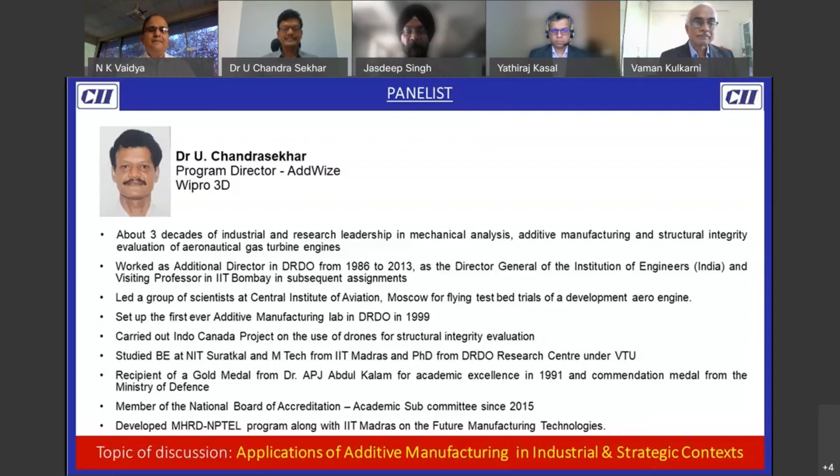Thank you for the generous introduction, Mr. Vaidya. Getting connected with you through this wonderful platform created by CII. Can I ask Mr. Jasdeep whether I am permitted to share the screen now? Yes, sir, we have given rights to present your screen, sir. Could you just confirm whether it has come into presentation mode? Because sometimes there could be a lag. Is my screen seen? Yes, sir, it can be seen. It is a full slide now.

As Mr. Vaidya mentioned, we have known each other in the context of manufacturing for quite some time. Just to refresh our memory, in the year 2004 there was an event at J.N. Tata Auditorium in IISc with focus on additive manufacturing.

Those days it was called rapid prototyping. We had the likes of Dr. Sumantran from Tata Motors, Dr. Pawan Goenka from Mahindra, and Dr. Bharat Balasubramanian from Mercedes as keynote speakers to delineate the potentials of additive manufacturing in product design and development. The keynote session was conducted by Dr. Kalam in October 2004. So those days, the technology was largely associated with prototyping and visualization.

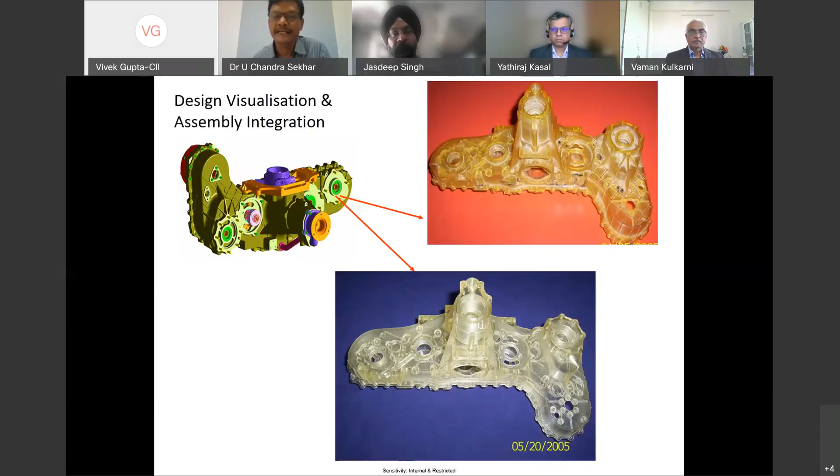Indeed, the poster boys for rapid prototyping or additive manufacturing used to be technologies like fused deposition modeling of Stratasys and stereolithography of 3D Systems, wherein the primary and most dominant application used to be conversion of CAD data into a representative physical model. What you see on the slide is the full-scale model that I did for the light combat aircraft program, related accessory drive gearbox housing, in 2005.

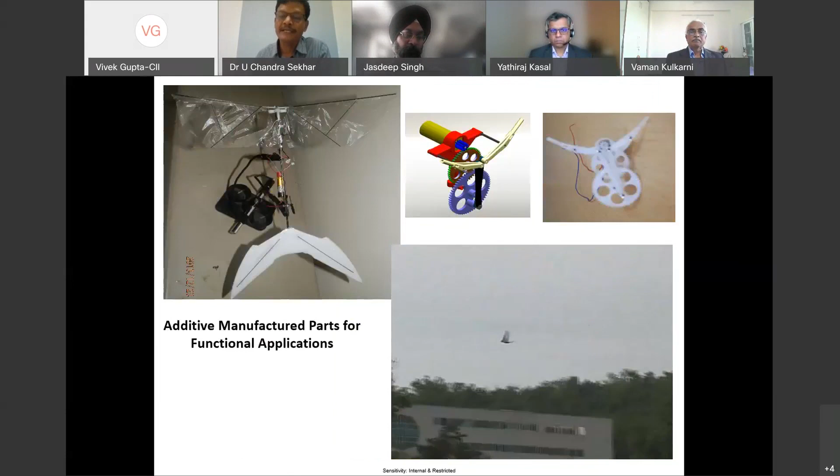When user groups started realizing that here is a technology also capable of producing thermoplastic parts with the necessary strength to surmount the loads and stresses connected with real-world applications, users started making use of these thermoplastic parts, as in this case for making a flapping mechanism that can power an ornithopter. This was a DRDO-NAL project done in 2007 or 2008 for demonstrating the possibility of a small duration ornithopter flight. But what was interesting happened later.

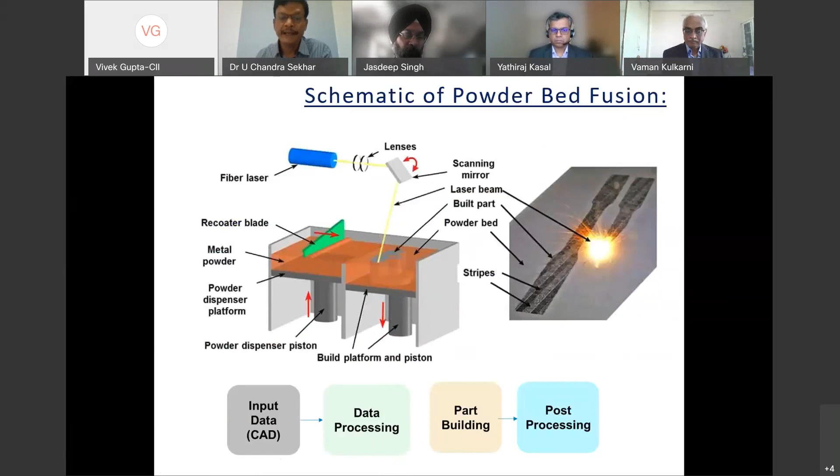Thanks to the contribution from interrelated topics like laser physics, material science, qualification, testing, software engineering, and control engineering, technologies like directed energy deposition, metal binder jetting, and powder bed fusion came to the forefront, and along with that came a plethora of applications.

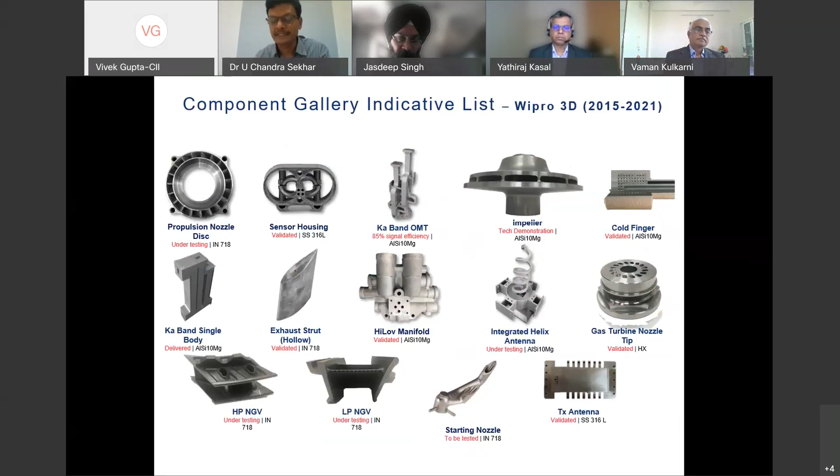The most important fact is, while the initial set of applications were largely confined to prototyping and design visualization, in recent times we have seen a paradigm shift towards a thrust or need for fulfilling end use. This could be in the context of strategic sectors like aerospace and defense, or the industrial context synonymous with automotive and process industries.

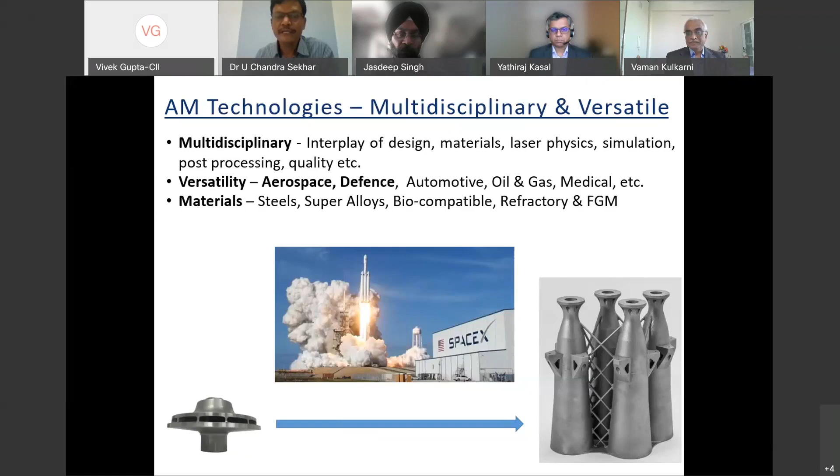What is also very important is there is rigor and earnest effort on the part of users to look at making complex parts that are supposed to withstand high pressures, high temperatures, extremely challenging environments including corrosion susceptibility, and make use of 3D printing or additive manufacturing to replace conventional manufacturing for a part.

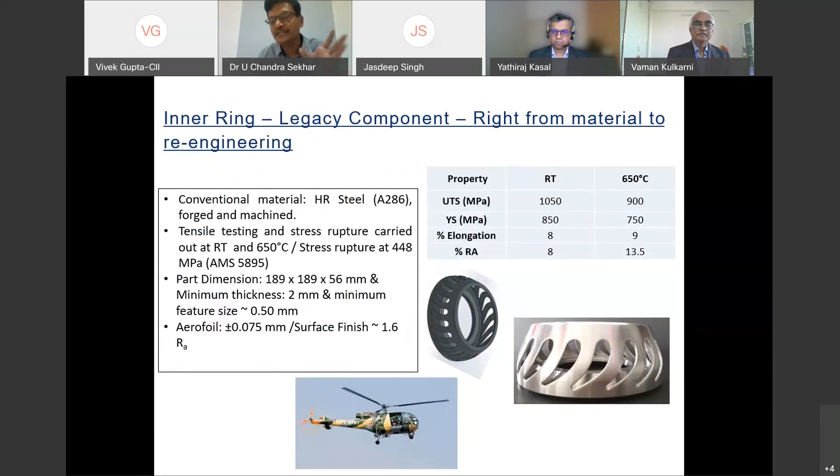Some of you might have seen this news item about 3 weeks old, wherein Wipro worked along with HAL to make an integral part of the Chetak helicopter engine called inner ring, made out of high temperature resistant steel, supposed to perform for the designated duration at more than 650 degrees centigrade. If you look at the entire process of development, the part building is only about 15 to 20%. The remaining 80% is all about developing the strategy for testing, proving out, and creating compliance with airworthiness authorities.

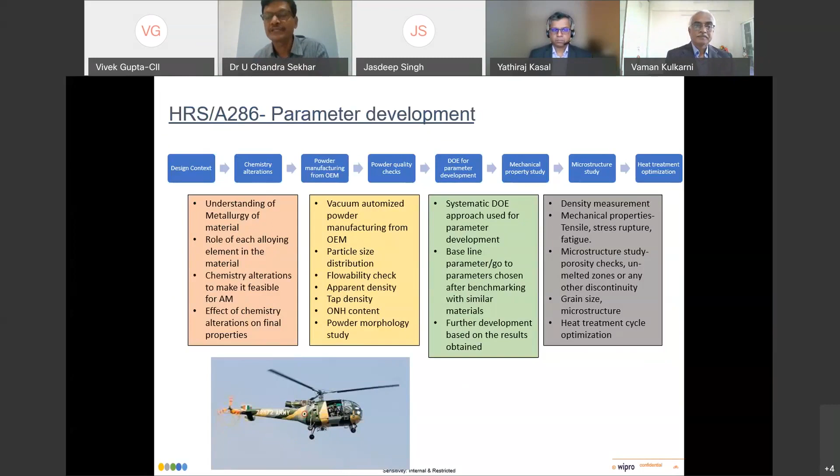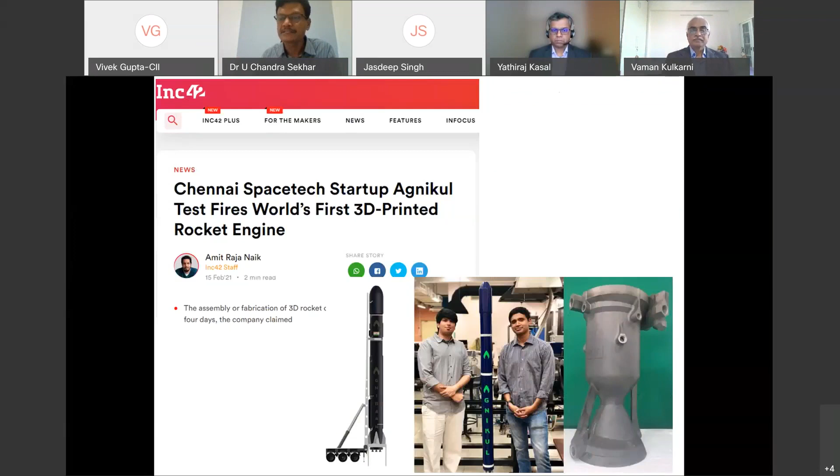So I talked about HAL, ISRO, and Wipro, which are large engineering conglomerates. It's very heartening to see similar phenomena evident in the startup ecosystem. Just a week before, we heard about a Chennai-based space startup called Agnikul, who created a monolithic rocket engine, including the injectors, cooling channels, igniters, using powder bed fusion out of nickel superalloys. We have seen teams from VIT Vellore, IIT Bombay, IIT Chennai, who happen to work with Wipro 3D in re-engineering some of the parts.

What is shown in this case is the steering knuckle made out of titanium. The conventional part is bulky. It was replaced with a very efficient design and converted into a physical edifice using laser powder bed fusion.

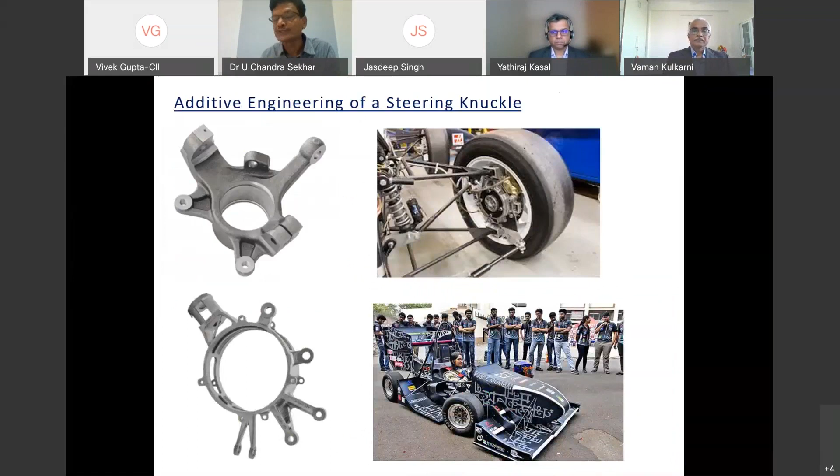So if you want to really capture the capability of additive manufacturing in the context of defense as well as strategic and industrial sectors, I would like to say that in the case of the healthcare sector, the acceptance has been to such a level that even series production of patient-specific implants and orthodontic aligners have come into place for almost 7 to 8 years now.

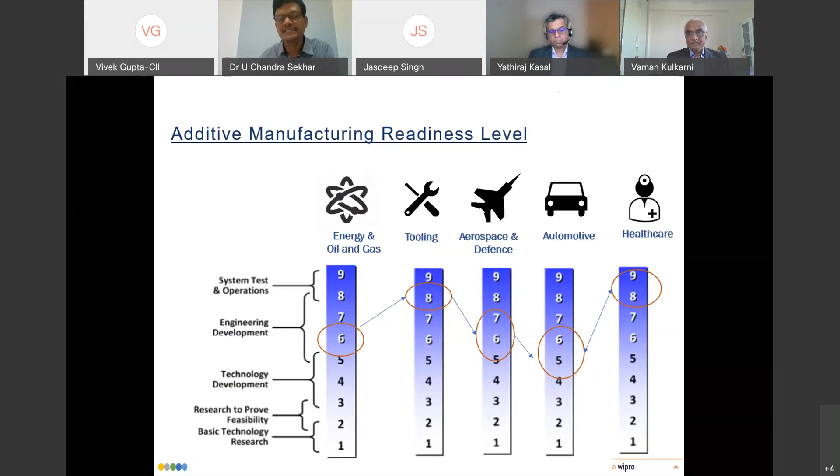Whereas in the context of automotive and process industries, where economic considerations are equally powerful alongside technical considerations, maybe the readiness is at a lower level. But continuously, there is an enlargement in the availability of material, including functionally graded materials, superalloys, refractory materials, titaniums, steels, and we have seen more and more new user groups emerging.

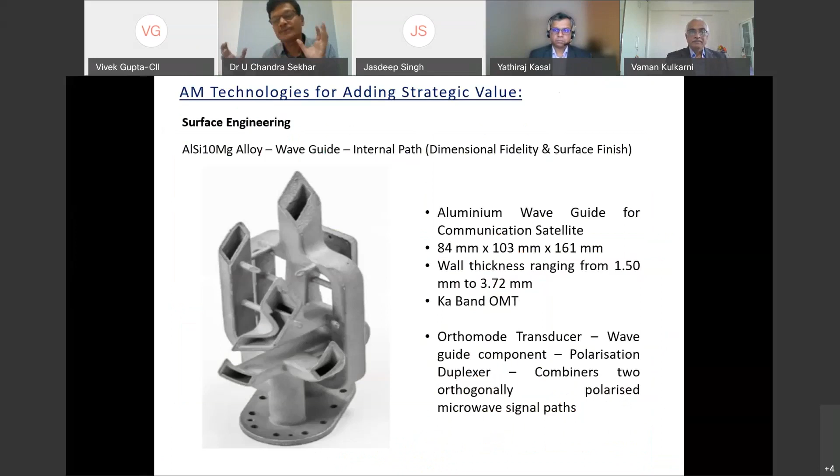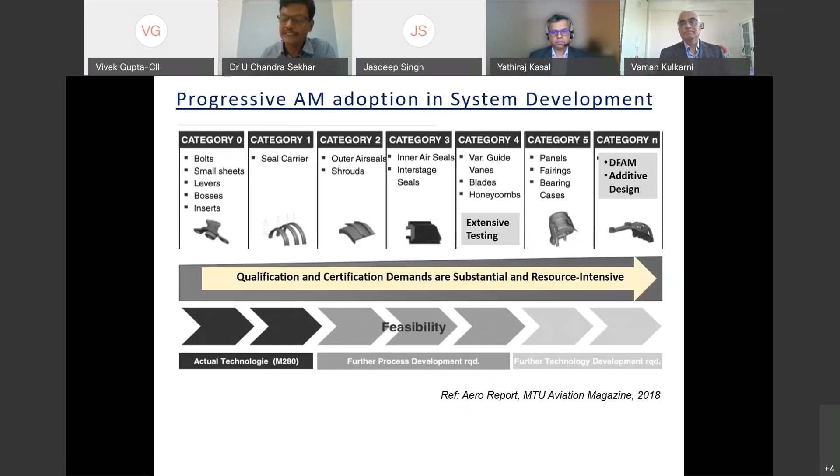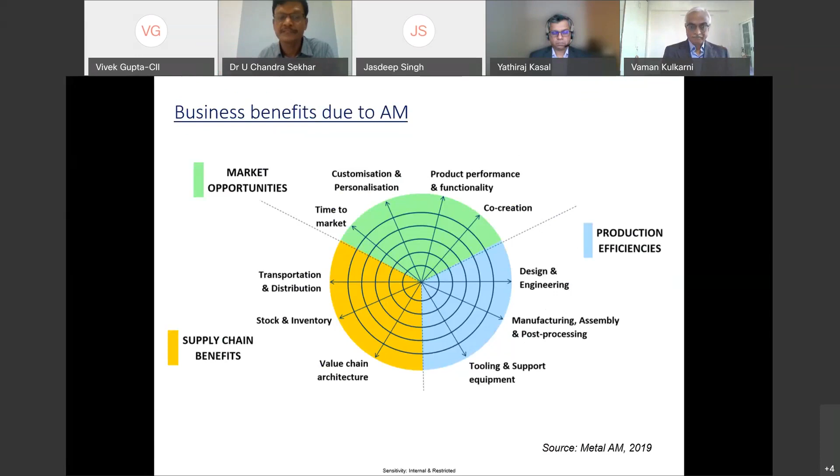The drivers for this technology could be different in different contexts - could be opportunities, production efficiencies, or supply chain benefits. That's why we have seen screaming headlines some time ago that a global conglomerate like ArcelorMittal is trying to create a repository of spare parts in the digital world, producing parts on demand, just in time, for their global consumption.

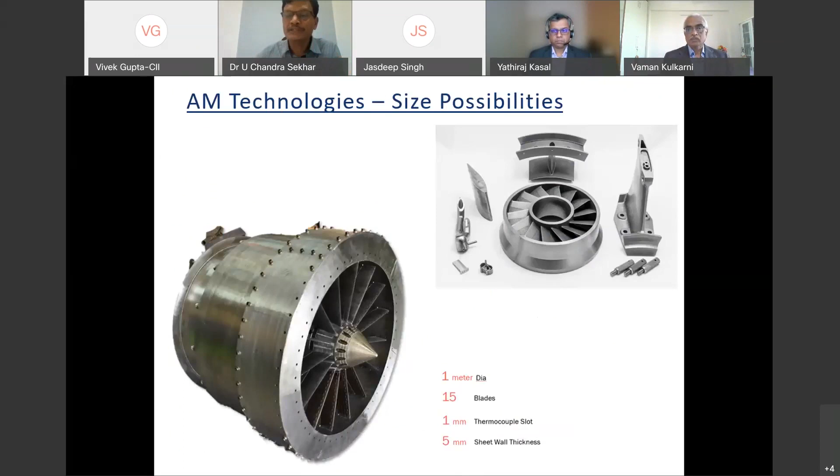It's not a must that we need to really replace conventional manufacturing with 3D printing. As shown in this slide, we can have a hybrid approach for making large parts, wherein conventional manufacturing can coexist alongside digital manufacturing and produce parts for the benefit of the user context.

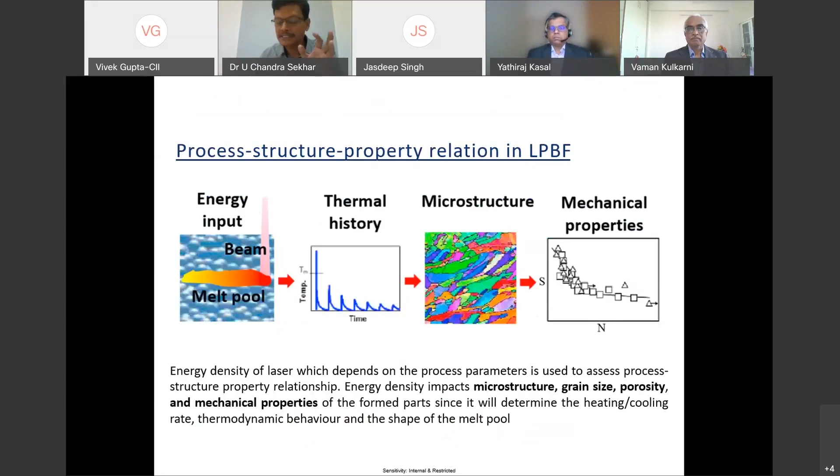Important to understand that the technology is difficult. There is a continuous emphasis on the process-structure-property correlation. There are several process parameters, including microstructures, porosity levels, anisotropy, defect distribution, which you need to understand, and all this requires a lot of effort and tolerance on part of the user group.

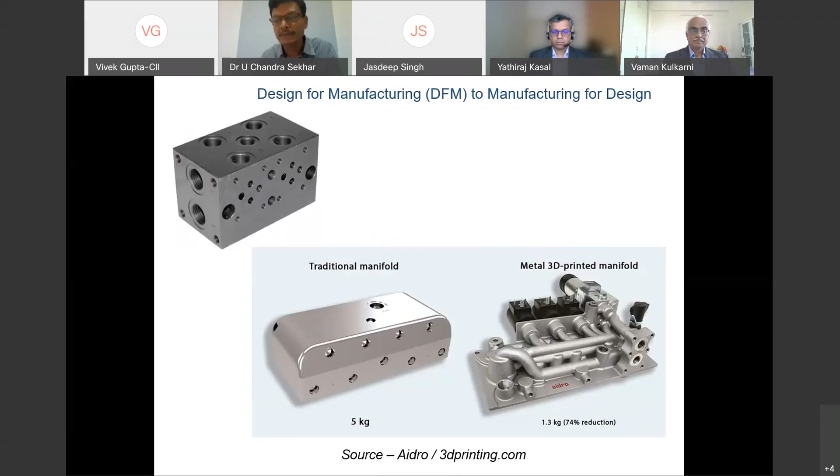I just want to conclude my presentation by saying that this technology can become more powerful if existing components, which were traditionally created for conventional manufacturing like casting, welding, or forging, can be reimagined and take advantage of this new technology in terms of cutting down weight, cutting down the number of parts, and introducing multiple functions into a single part. So with this, I would like to conclude and hand it back to the coordinator, Mr. Vaidya, with a big thanks.

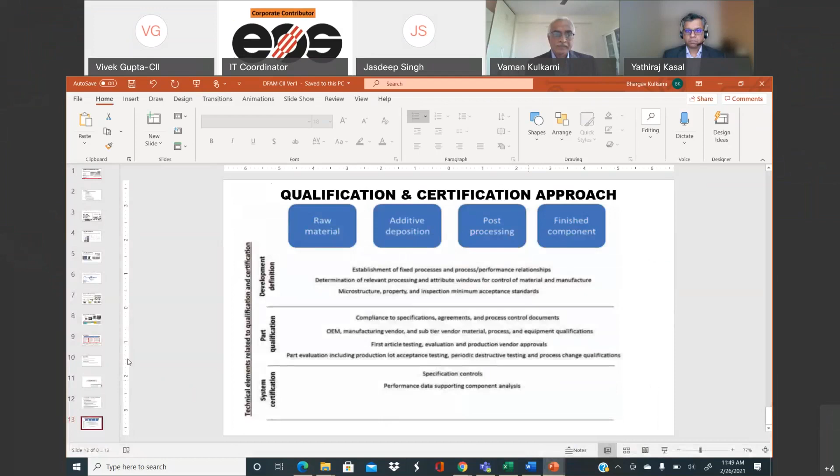Are you able to hear me? Yes, sir, we can hear you. Okay, so as the slide comes up, thanks Dr. Vaidya for that nice introduction and setting up the context for today's talk. And of course, Chandrasekhar, as usual, has talked about right from the nascent stage to where we are today for additive manufacturing, having worked for the last 25, 30 years.

My journey with additive manufacturing typically started around 2014 when metal additive manufacturing became a little popular. Those days, there were not many people having printers in India for metal printing. Wipro had just started, and GTRE had purchased but was yet to start. So that's where we started our journey of additive manufacturing in Honeywell.

During the initial stages of additive manufacturing, the importance was more to print parts for prototyping or tooling. That's where the technology was. There was not so much emphasis on design for additive manufacturing because it wasn't getting into production, but rather to quickly make prototypes, validate the design, and then take it to production through conventional ways, or for tooling purposes. That was the initial emphasis, but subsequently it started getting into production—initially just replacing the existing part, no changes to the existing design, but building a part which withstands all the performance and durability requirements. That was the initial journey.

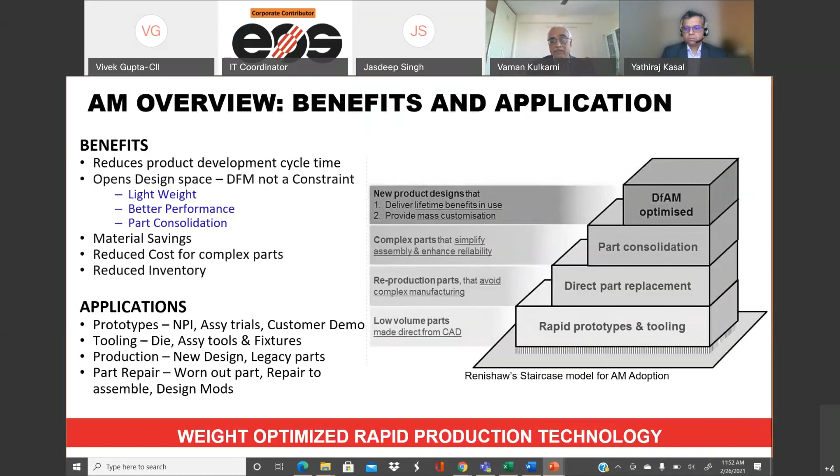But the real benefit of additive manufacturing—getting lightweight parts, improving performance, or reducing the number of parts—those benefits we can get only when we get into design for additive manufacturing in a very systematic and detailed way. That's what I thought to focus on in the current session: how we can systematically carry out design for additive manufacturing to get the best benefits, and then see where we are and what challenges still remain. Subsequent to my talk, there are a few industry people who can tell us how these things can be addressed.

The first and foremost thing is that additive enables free-form fabrication. There are no limitations as such, so we can come out with a really optimum design which can improve performance and reduce weight. That's where we want to leverage the benefits of additive. Of course, the design should be suitable for additive manufacturing—the process of building the part has its own technology, so we need minimum supports so there's minimum post-processing required to remove that support, as well as very less wastage of powder. Also, the part should be reliable and able to be manufactured consistently. That's what the industry is looking at.

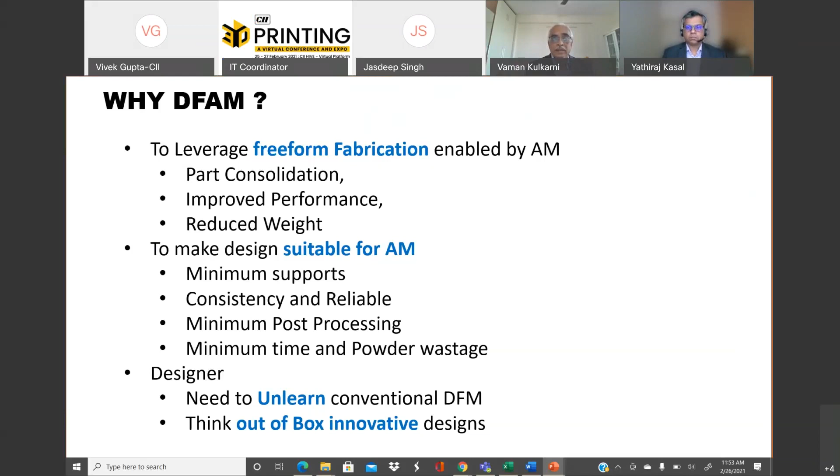Some of the questions which Chandrasekhar brought out in terms of porosity and microstructure need to be addressed. If you consider those things well in the design phase itself, then we'll be addressing most of those challenges. In most cases, we may require some minimum post-processing to meet either the performance requirement or the finish of the part we are looking at.

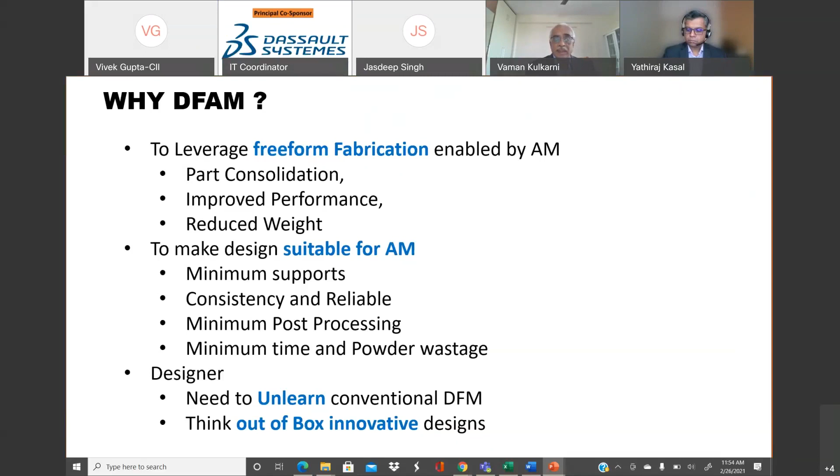So how to come up with the best solution as part of design for additive, so that we have minimum post-processing. What enables this is we need to unlearn some of the conventional design for manufacturing, because the way each one of us have been taught is to keep in mind the conventional way of manufacturing and have those constraints during the design. So we need to take out those constraints, unlearn some of those conventional things, and have out-of-box innovative designs to get the best benefits of additive manufacturing.

I'll touch upon the key relevant areas which need to be considered as part of design for additive manufacturing. The first thing which I think all of us agree on is topology optimization, which has been in place for the last 20-25 years, but was not effectively used because of the manufacturing constraints. But today with additive manufacturing, topology optimization is working hand in hand to come out with the best design.

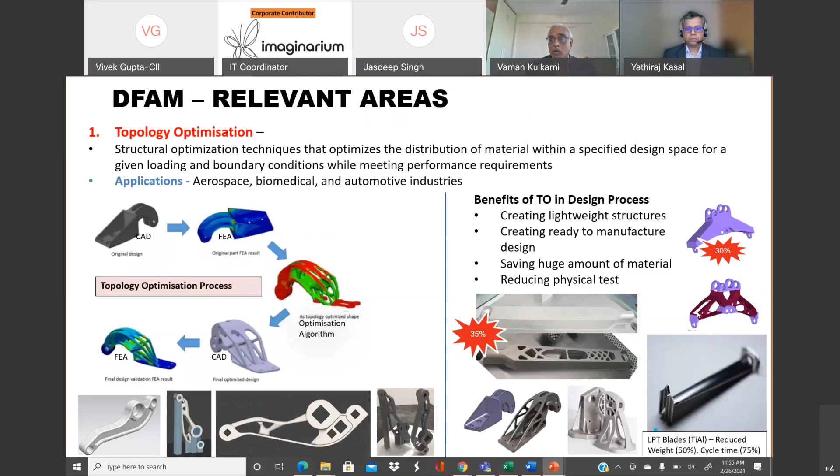There are some examples shown here: the APU mount bracket, how we can make it lightweight with topology optimization, then the wheels and brakes pin, how we can make it lightweight. Those are very good examples. We can reduce the weight by 50%, and the cycle time of having these parts could also be reduced by more than 75%.

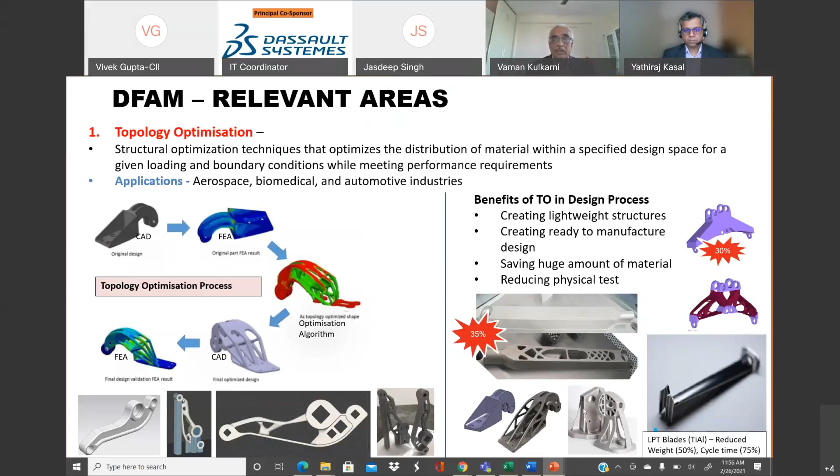The second important thing as part of DFAM is the cellular structure, which additive manufacturing enables. We can really have the design incorporate this feature to get the best performance out of it. Typical examples are having a very high strength to weight ratio and having high heat transfer, the thermal insulation. Those are the benefits we get by having these cellular structures.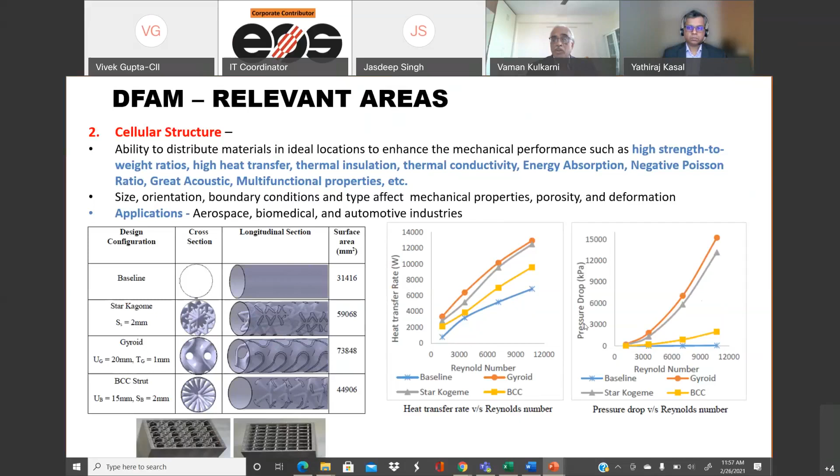There are contradicting requirements, like you want to have a high heat transfer rate, but at the same time we need to have very less pressure drop. So we can quickly come out with different options and then decide on them. For example, here the BCC structure gives a good heat transfer, but at the same time it has a very low pressure drop also. So those are the things which are possible with lightweight structure.

And the third thing is part consolidation and assembly. We should not be looking at just that particular component; we need to have a bigger picture of the assembly so that we can reduce the number of parts.

The GE fuel nozzle is a very good example, where the entire fuel nozzle, which used to be made out of 20 components, is now made of just one single additive part. Similarly, the heat exchanger, which used to have 163 parts, is now reduced to one.

So there are a lot of benefits we get looking at the next level of assembly, and then how we can consolidate the parts. The Honeywell part, which is a flow restrictor, a very tiny part which used to have 10 parts, and it's not just the number of parts - it eliminates special processes like brazing and welding which could be involved, and it also eliminates the assembly time and the fixtures required as part of the assembly requirements.

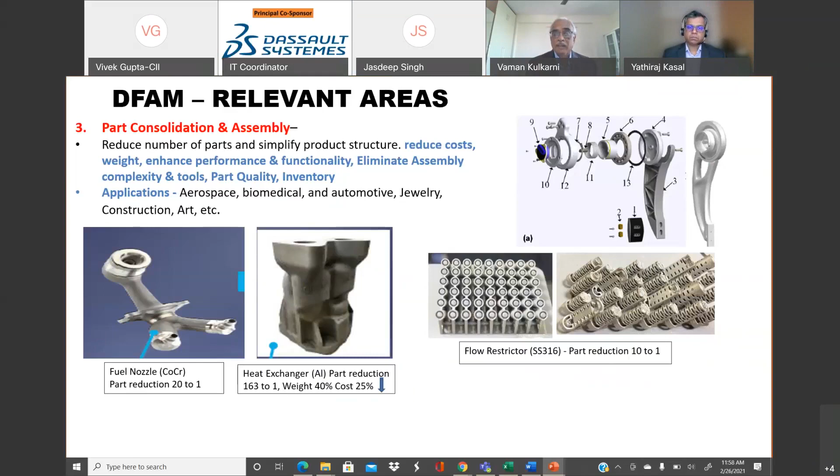The fourth most important thing is the materials, what additive is enabling. Chandrasekhar talked about multiple materials, but the key benefit we get is considering multifunctional optimization when considering the materials. We can also eliminate the waste of material which typically happens in conventional machining. Functionally graded AM, either multi-material or intentionally introduced porosities, will help in having varying properties of the component we can build. So those are the benefits we get.

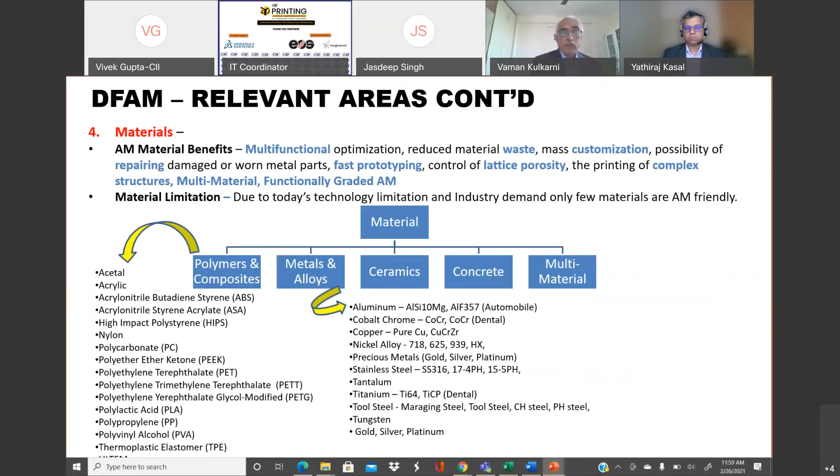If you consider these things in the very beginning, you are going to have big benefits. And when you come to the AM process itself of building the part, the support structure is a big thing. You can successfully build a part, but if you want to finish it by taking out the supports, it's going to be a bigger challenge if you haven't considered the best way of building the part through AM.

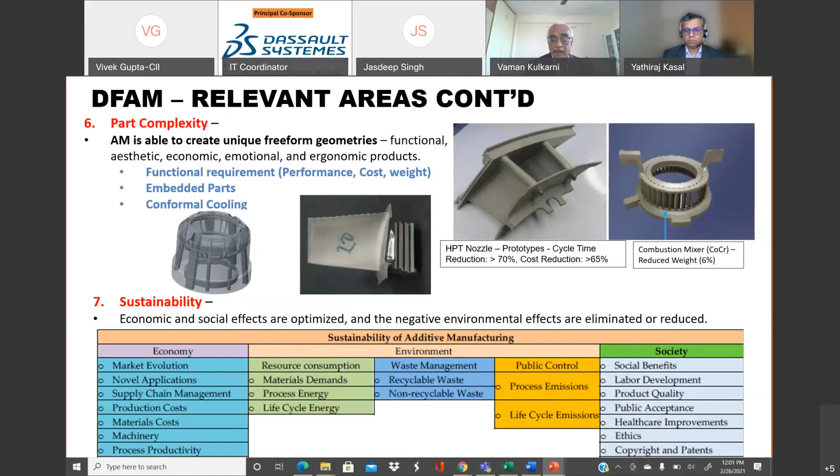And sustainability is with respect to our surroundings - how to make cost-effective solutions, how to make less wastage which is environmentally friendly, and how we can make it more beneficial to society.

So before I conclude, I will talk about a typical approach. We start with the system design, not just the component, so that we can select the right component and also look at consolidation of parts. Then when we get into the detailed part design, we look at how to incorporate things like topology optimization or lattice structures as part of the design.

When it comes to process design, we determine the best way to build the part to minimize post-processing and support structure. And of course we leverage AM simulation, which is available today. This capability was very limited about 3-4 years back, but today the tools are available to completely simulate the build process. It is yet to develop at the microstructure level, but it has been a very handy tool to finalize the design before we actually build the part.

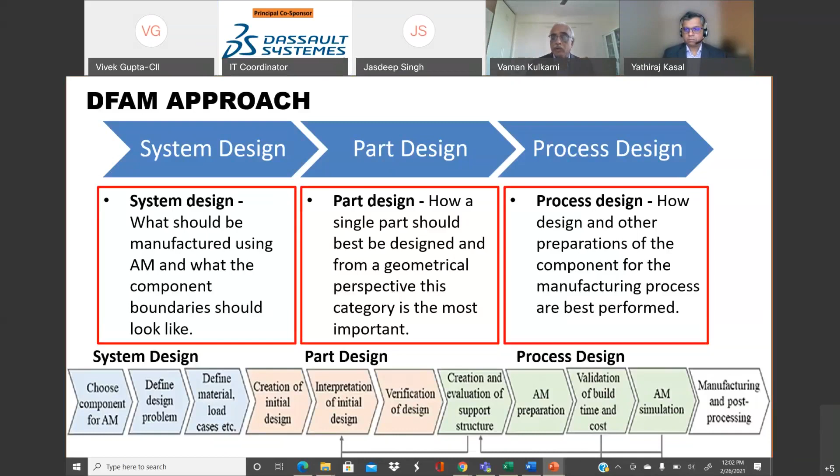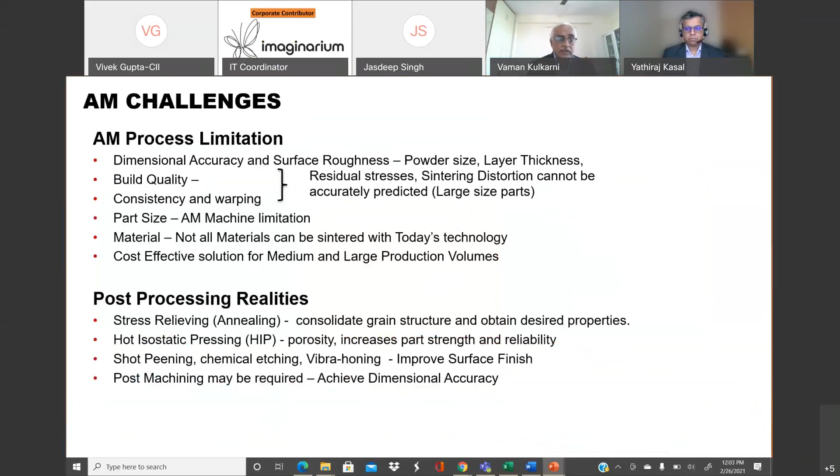In terms of challenges, there are still a few reasons why it's not accepted by the industry, as Mr. Vaidya mentioned. One is the part size itself, the material itself, and it has to be a cost-effective solution ultimately. For medium and large production volumes, we still see this issue.

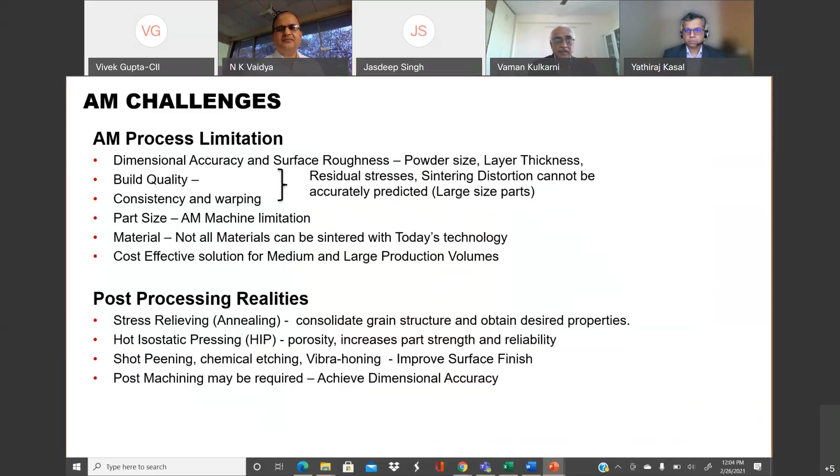So I'm sure that technology is there to stay for next decade, and it is going to play a big role in smart manufacturing. Thank you. That's with that I conclude my talk.

Within GE, GE Aviation was one of the earliest to embrace additive and start the additive journey. And GE9X, which is the largest engine, the front fan itself is more than 11 feet, which means two of us actually can stand on each other and will be slightly shorter than the fan itself. The engine diameter is almost equivalent to the 737's fuselage. It is such a huge engine. And as you may be following on the news, last year around this time, it took its first flight.

So these components are, all the components which are there in this one, are already certified and qualified. And GE9X also received a Guinness Book of World Record for producing the largest thrust, which is 134,000 pounds of thrust. So why am I talking about GE9X?

I mean, we are here to learn about additive, right? So GE9X has a bunch of additive parts. It has as high as 294 additive parts when it made its first flight last year. It has a 10% lower fuel burn compared to its predecessor GE90. Large portion of it is directly attributable to the technology advancements, and largely some of it is directly enabled by additive parts, I would say. Which are the parts which are there in this GE9X engine making up these 294 parts?

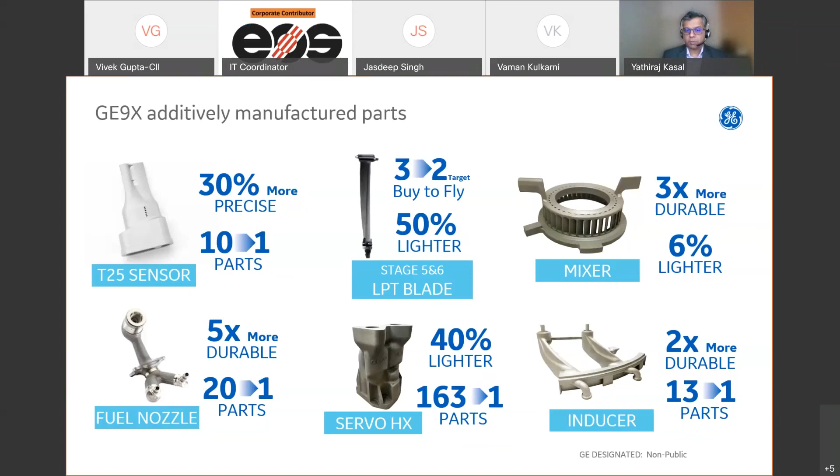So T25 sensor, fuel nozzle, mixer, inducer, all of these are today produced on concept laser machines, M2 machines, made out of cobalt chrome molybdenum alloy. LPT blade made out of titanium aluminide, produced on Arcam machines using EBM technology. Servo HX F357 aluminum alloy, again being printed on concept laser M2 machine for that matter. So these 6 parts are already certified, qualified, kind of into the low rate initial production kind of a thing.

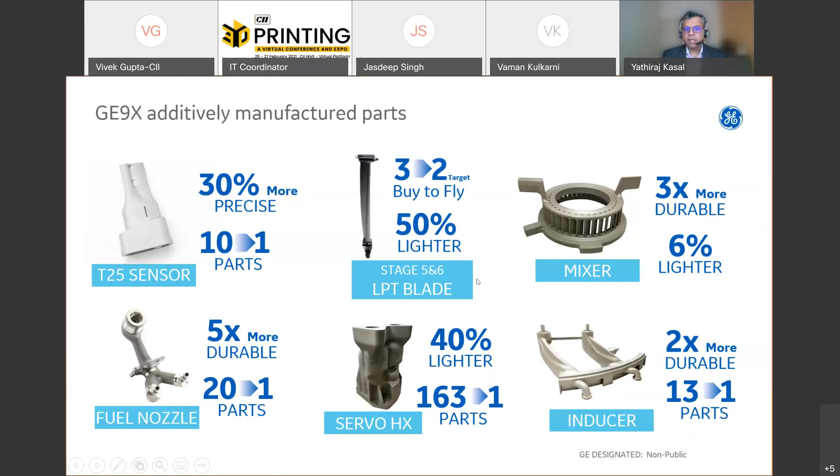So how did we make these many parts into aerospace? Aerospace is not an easy industry to qualify and certify the parts, right? We have to meet a lot of regulations, of course. So this is our path to production, in a very high level, I would say.

If I have to talk on how we qualified each of them, probably it would take a day for each of those parts, but I am trying to give a gist of it in probably a minute or a minute and a half. We often hear that additive is very special, very unique, that the qualification is very challenging and things like that. But if you just zoom out a bit or step back a bit, this production process is like any other production process. Only thing is, yes, there are some new aspects to additive.

There are some unique aspects to additive, not denying that, because it opens a lot of possibility like topology optimization or going to the feature sizes which were not possible in casting or any other machining process. So the manufacturing technology definitely opens up a lot of avenues for great innovation to happen. But at the same time, nothing comes for free, right? So when we are pushing the limits of the design, we also need to address the challenges of those designs in the certification front.

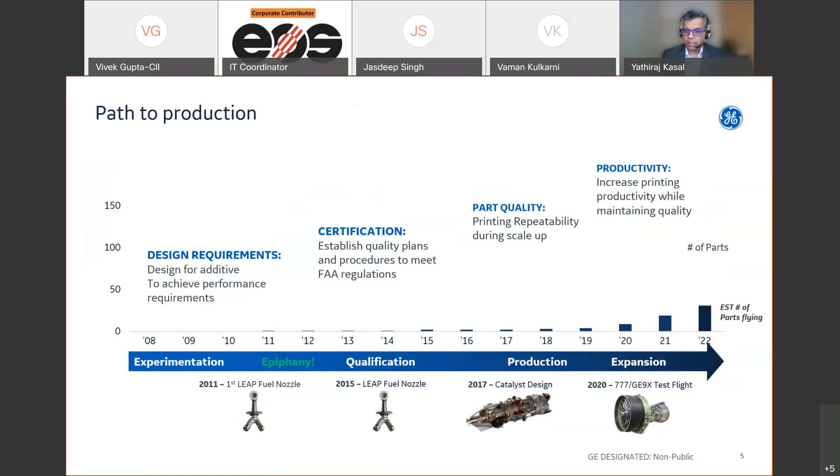And then you will move it into the large scale serial production, where you would have ironed out all those creases and made a smooth plan of making thousands and thousands of parts. As we speak today, there are more than 50,000 LEAP fuel nozzles which are actually flying, right? So additive manufacturing is no longer a technology for prototyping or only tooling.

This is very much a production technology. We need to understand how to reach the production phase, and what are the important aspects when you get into producibility. So here we are showing two great parts designed for additive manufacturing. One is the fuel nozzle tip. Typically you see the fuel nozzle in that shiny picture, but this is actually the additive part inside it. Only the nozzle tip is produced through additive manufacturing, not the entire part. Within that nozzle tip itself, there were 20 parts which were brazed, welded, and machined. Now all 20 parts are a single part. So what we are trying to show is that aerospace, or any industry, has its own challenges in meeting performance requirements, and the manufacturing process has to deliver the shapes or dimensions required by the designer. Hence it becomes important to understand the dimensional requirements and how we are going to deliver them.

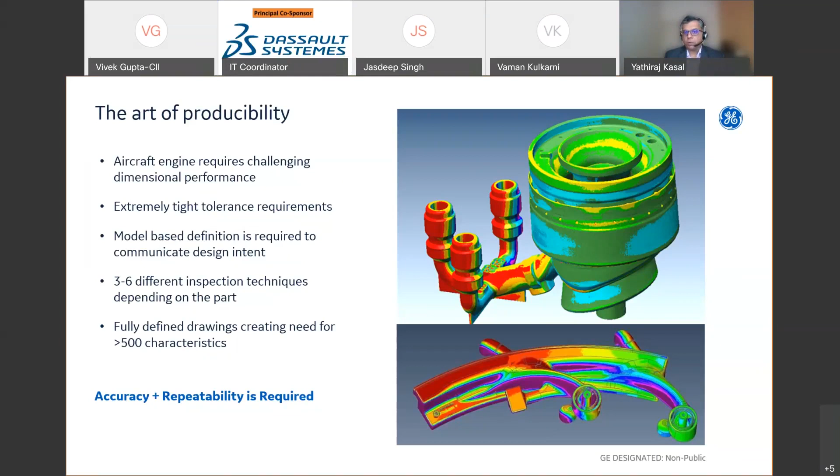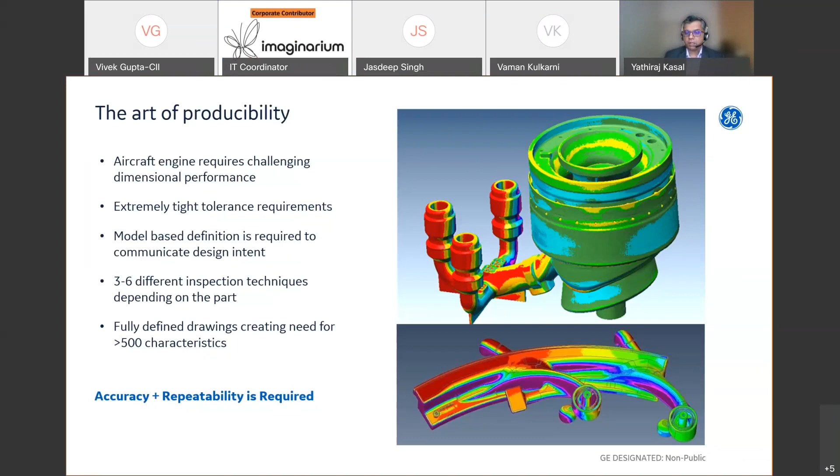Here we are showing one method of comparing the dimensions. Green is good, red is bad in these pictures. For another plot, red might be good, but on these plots red is bad. So you can see what kind of deviations you can expect from 3D printing and how we will address those things to make sure.

Can you please hasten, Mr. Yathiraj? Sure, definitely sir. I think I have only one or two.

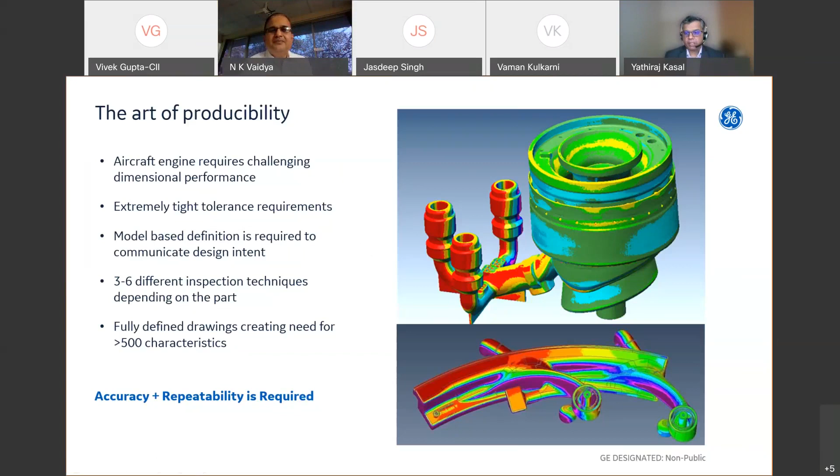This particular part has more than 500 characteristics which need to be measured and qualified for additive manufacturing. So when it comes to producibility, accuracy and repeatability are the two keywords you have to keep in mind. We have a lot of aspirations, but there are realities. We need to understand what those realities are when it comes to the manufacturing process and how to address them to reach the design or quality requirements for your part.

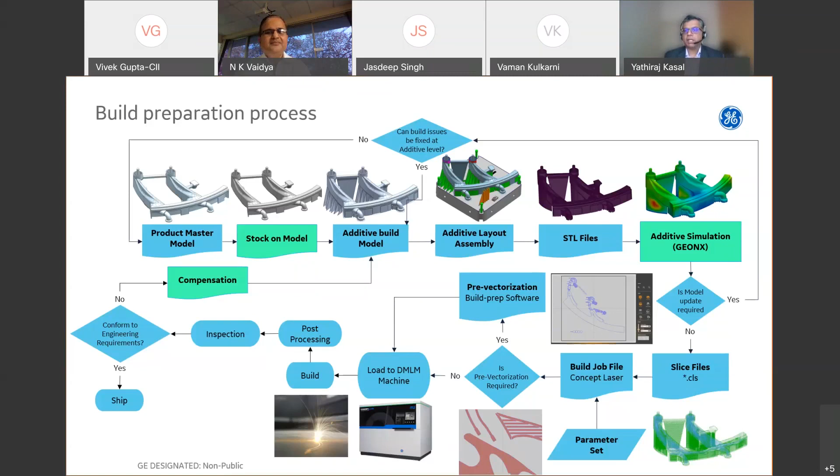This is a very detailed chart, but I am not going to go over all of these things. The main point I would touch upon is that there are tools like simulation tools which help you predict the deviations or deformations in additive manufacturing. Use these to understand upfront, before actually printing the part on the machine, what kind of deformations would be possible, and make those adjustments beforehand before going to the machine.

So that is one key takeaway from this chart: it pays a lot to establish manufacturing processes. It is very important to lay out your process and understand which things you want to lock down or freeze before getting into serial production. For example, build files or build layout - you want to lock those, not have them changed every build. You need to understand which parameters you will monitor, and where you need standard work instructions. Understand your process not just from the additive point of view, but end-to-end - your individual processes, how you will control them, and what records you need to keep so that the path to certification becomes smoother.

The time given was very less. I have tried to give a bird's eye view of parts, how they are certified, and how we get into production. But I would be more than happy to connect with you beyond this platform to understand your requirements and how we can help you get into the production phase.

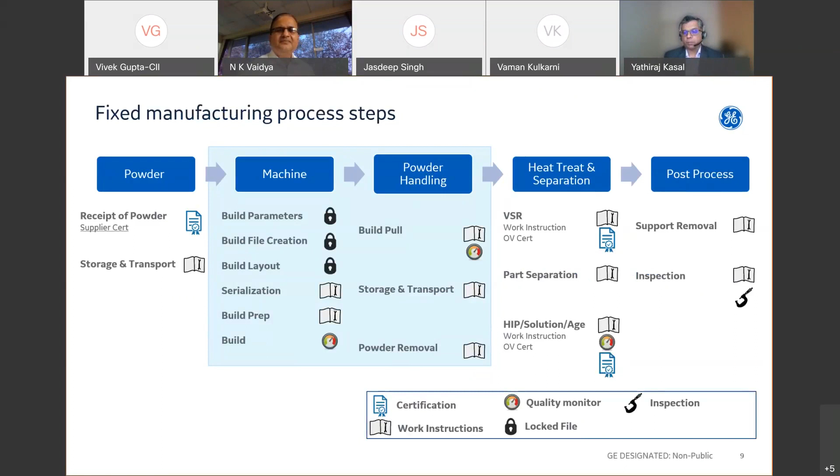Thank you. Thank you very much, Mr. Yathiraj, for very enlightening insights. Friends, delegates, please trust me, these are all very complex topics requiring long debate. However, we have got only 10 to 15 minutes, and our speakers are trying to explain to us. Let's go to the next session.

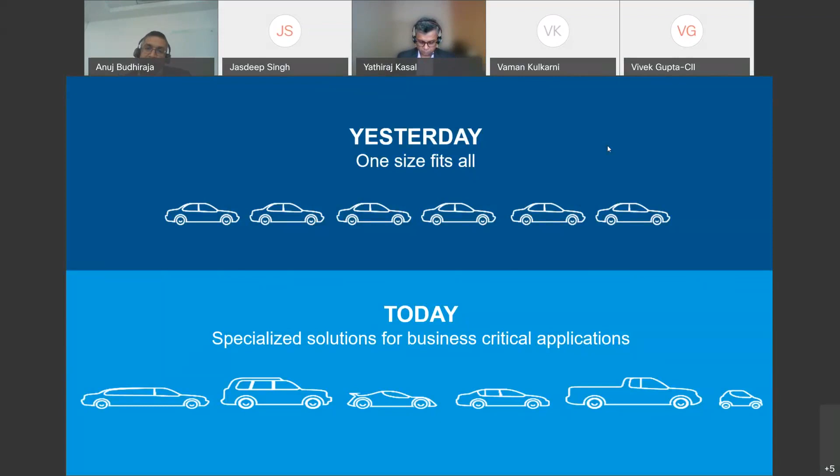So all these requirements are coming up from customers, and it all comes with new challenges, which require going through lengthy setup of machines, employee safety, and ergonomic defects which are caught too far because of the workload of different variants onto the manufacturing shop floor, and obviously the cost, time, and storage also.

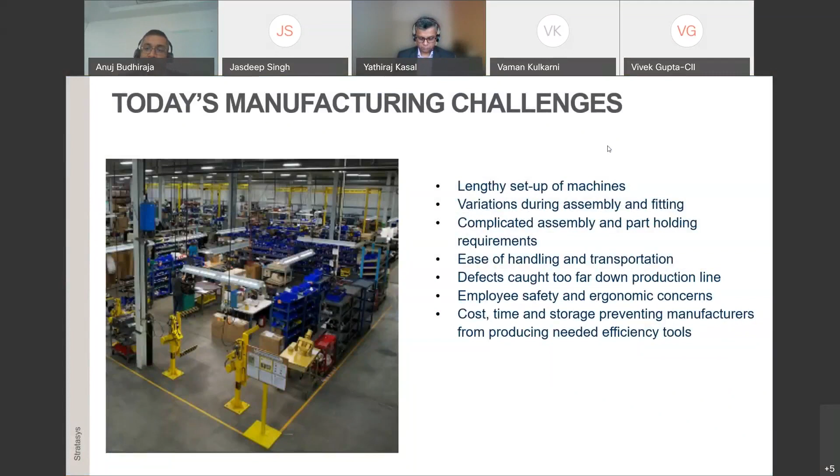So how is 3D printing helping all these manufacturing aids to optimize the manufacturing shop floors by helping decrease the cost, by reducing the overall cycle time, as we all know each and every product has to go through a design and product development cycle and the manufacturing setup times also.

So this technology, additive manufacturing, is helping all these areas improve reduced cost and reduced cycle time, as well as reducing human errors, and allowing production for repeat orders without retooling within the same shop floors.

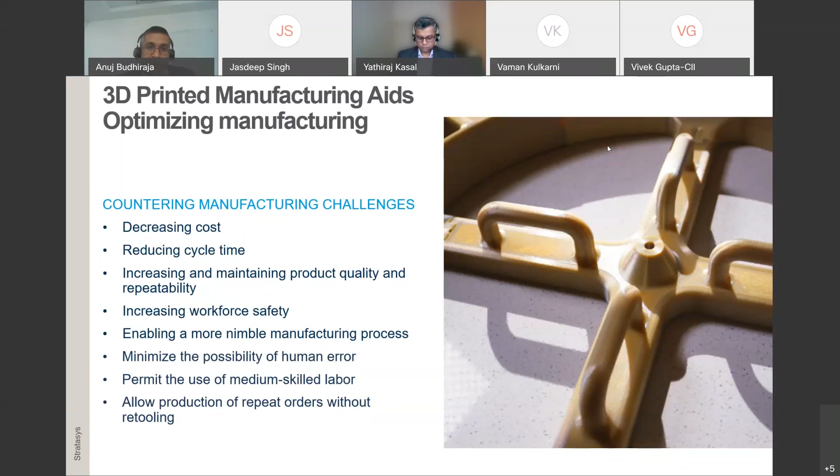This is a great example of Honda Cars India, where I have personally been involved for 2 years working with their manufacturing shop floor team, where the challenge was to reduce the weight of fixtures being used on the weld shop for checking metal body.

So if you look into all these upper fixtures, they were weighing somewhere around 25 kg, which was very, very heavy and cumbersome to use by the labor guys, and obviously not suited for each and every car. Now, given the task at hand, we used all the parameters of design for additive manufacturing,

as we have heard from earlier presentations as well, why DfAM is really important for adopting additive manufacturing in different areas of manufacturing shop floors, as well as batch production.

So by reducing and improving this design, moving from metal heavy fixtures to better ergonomic 3D printed fixtures, they were able to reduce the weight from 25 kg to 7 kgs.

So the whole Amaze body was being checked and is being checked for the last 3 years. Nowadays as well on the shop floor, all these fixtures are in use.

And all this analysis and benefits analysis was done by the Honda team itself, as per their Japanese philosophy of SQCDM, which is safety, quality, cost, development time, and operator morale as well. So they have got huge benefits.

So overall, I would say on the manufacturing shop floor, by implementing this technology in the last 2 years, they have put up a 3D printer on their shop floor, where they are reducing and improving things by adopting and using the 3D printer for a lot of jigs and fixtures.

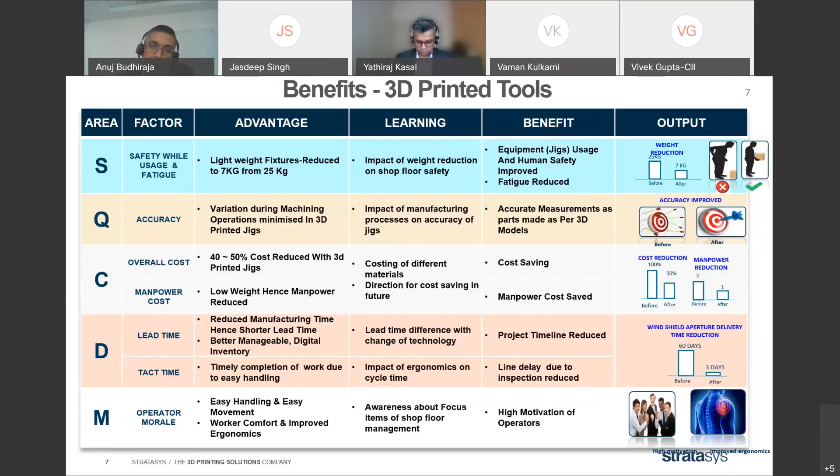So this is another example from one of our global customers, Eckhart, who is actually a large producer for manufacturing industries for their tool jigs and fixtures.

So one of the fixtures, if you can see in the picture, this is one of the metal fixtures which was replaced by a nylon 12 carbon fiber tool, and this tool is being used 60 times an hour for 8 hours, 7 days a week as well.

This is much lighter. So the benefit of adopting this technology is we do not have any design challenges, we do not have any manufacturing challenges.

So we don't need to think about how you are going to manufacture it, as compared to conventional manufacturing of these tools, where we have to look into the CNC capabilities and the overall lead time and development time as well. So the focus will be more onto the application, better ergonomics and ease of use.

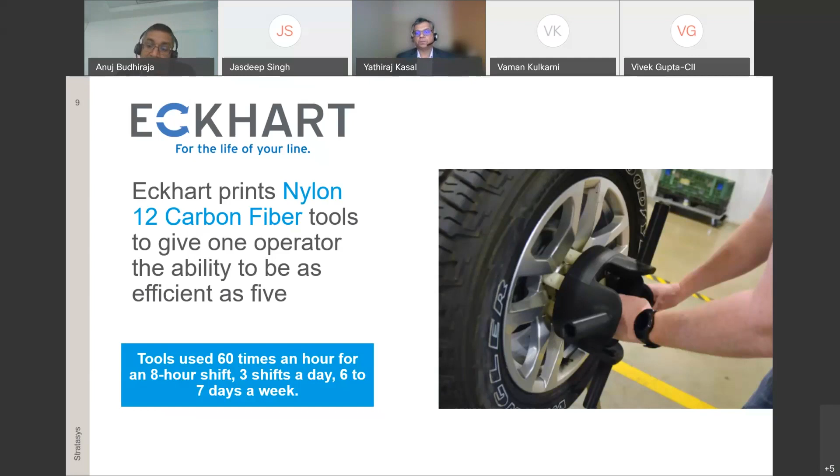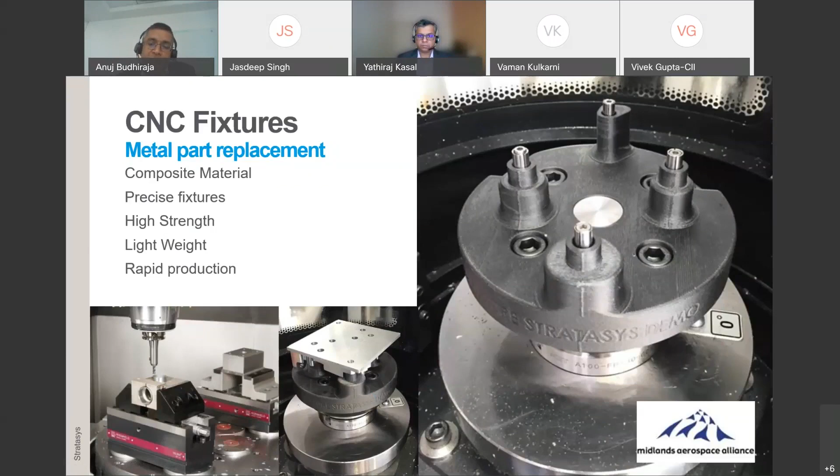As Mr. Vadya mentioned in the initial speech, we are barely touching 3D printing application in manufacturing as of now. The overall market potential is around $12 trillion.

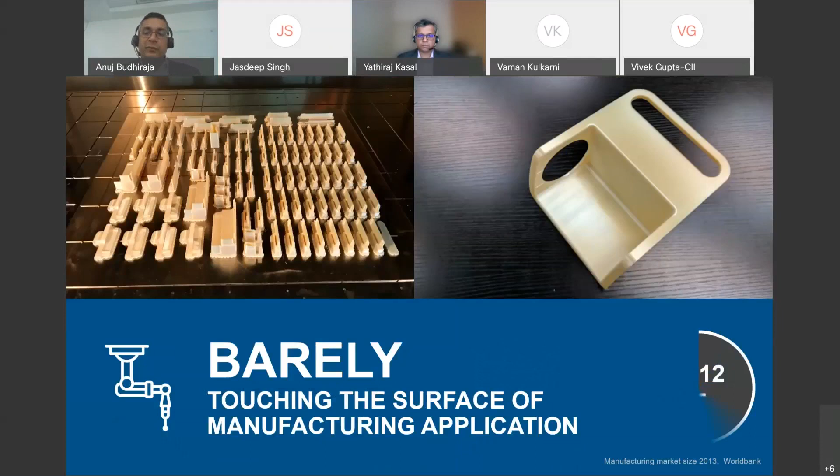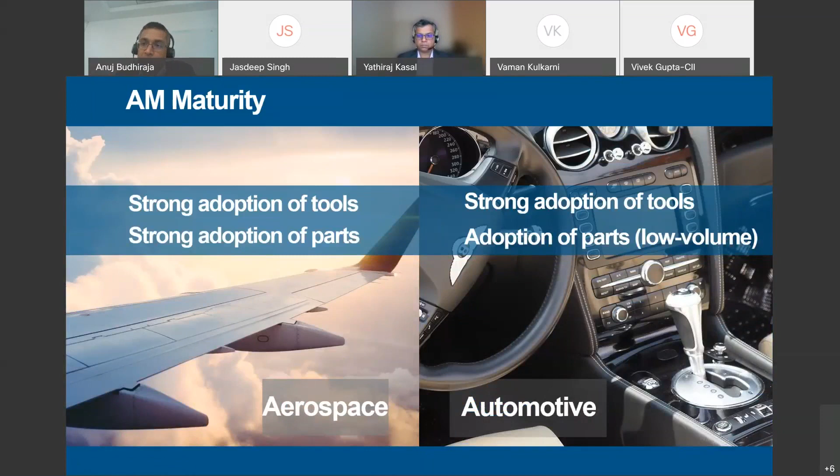It has already matured up to a certain level, as we saw in Mr. Yathiraj's presentation, with adoption of tools and parts within aerospace. In automotive, we are seeing strong adoption of tools now, globally already done. In India, we are doing a lot of work where we see this traction happening across automotive shop floors, with adoption of 3D printing in tools as well as parts. So these are the current challenges and opportunities.

What next? The next is using it for end use, which has already been done in automotive and now is being adopted across industries. One example is Siemens Mobility, where they are printing low volume spare parts, helping eliminate the need for inventory. So the new term coming for these technologies is digital manufacturing as and when required.

Another example, which we recently did around a year ago with BMW China, is giving customers an option to use their side liner as per their choice. They can choose their color, ask BMW to put in a name tag or number tag. As I mentioned, we are moving from mass manufacturing to mass customization, so the customer gets a choice of printing their name, color, and different textures on the end use part.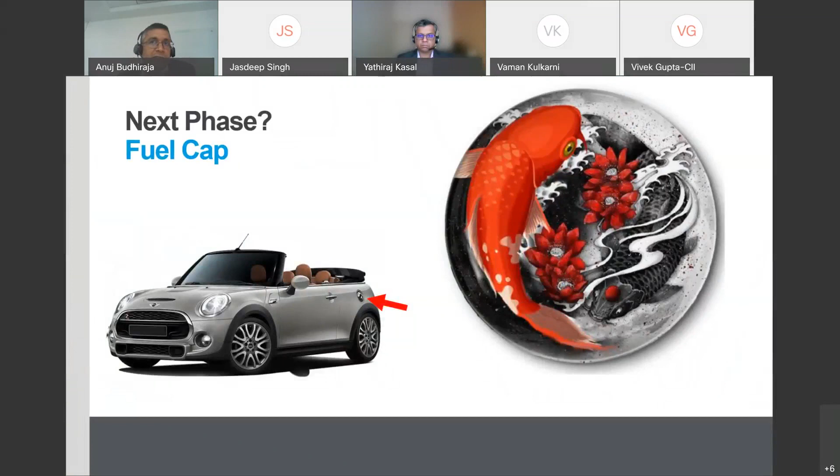So till today, I would say around 2,700 cars on the road in China have this side liner printed as per customer requirement. And we are working with them for the next phase also, which is the fuel cap.

So with this, I'll end my presentation with a message that in manufacturing, making it smarter, 3D printing is really making its way. And now the next move and next level is to move into using it for end use production also. Thank you, everyone.

Thank you, Anuj. Thank you for giving us the confidence that we are already on the road. Also, thank you that you could wrap up in good time because we are running ahead of schedule. Thank you very much.

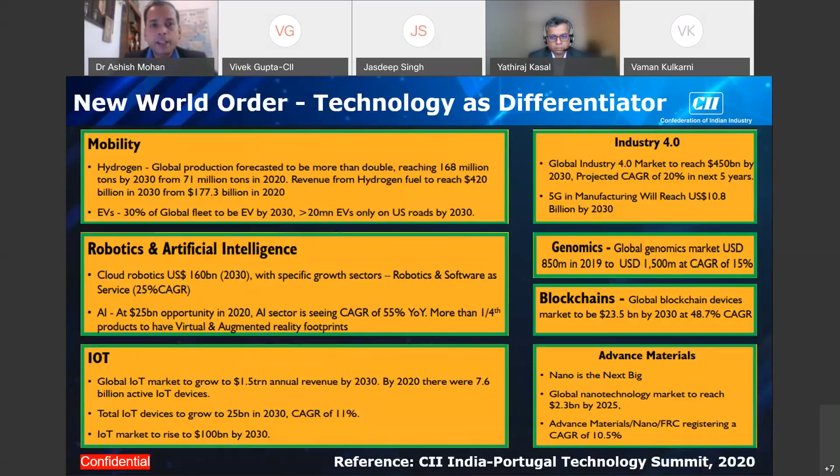So with that, if we see the global perspective, how the world around is moving, I will first give this slide with respect to overall science and technology, and the same countries - we will see what they are doing in additive manufacturing.

The US has been consistently leading the Global Innovation Index through its intensive research investments. In fact, more than 25%, a quarter of global total research inputs come from the US. International publications are high. Germany is leading as an Industry 4.0 pioneer. Japan with excellent resilience in R&D expenditure is doing wonderfully well in investment on science and technology. And China, the country to watch out for, has been consistently rising in its manufacturing footprint, led by high-tech technologies. But this is just the generic preview.

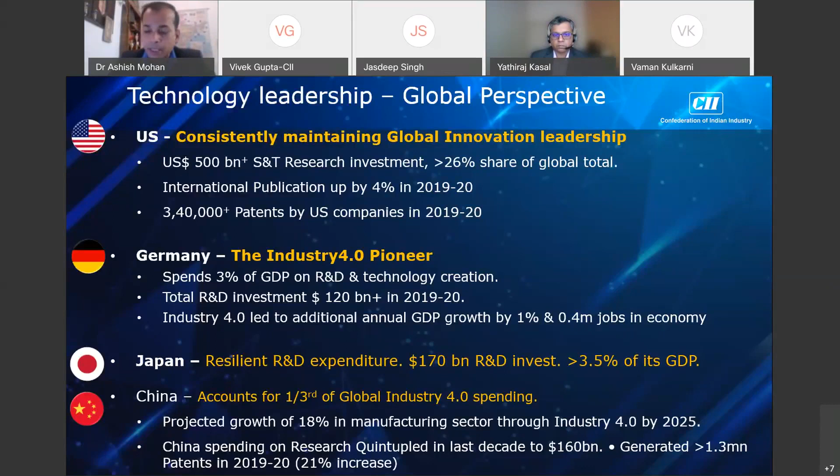Let us see what they're doing in 3D printing technology, which is the subject of this conference summit. The global 3D printing market size was $14 billion in 2020, but it's expected to cross the 60 billion figure in the next 5 years, with a CAGR of more than 30%. That's a huge growth.

The US maintains its leadership with 20% growth in 3D print technology. More than $1 billion in demand in the field is expected to come from the European Union as well, so these are also good players. But within the European Union, Germany is set to add another $1.2 billion in its 3D printing market size alone. So while we say the complete European Union has a potential of $1 billion, Germany's own internal corporate assessments say that they alone will be able to surpass this figure through the pioneer technologies of Industry 4.0 and smart manufacturing they've already excelled in.

Japan's 3D printing market is expected to reach US $450 million by the close of this 5-year analysis period. And China, the country to watch for, has the potential to grow by more than a quarter, 25% growth in its current size. I'm talking only with respect to the 3D printing technology market size. So huge growth worldwide is expected.

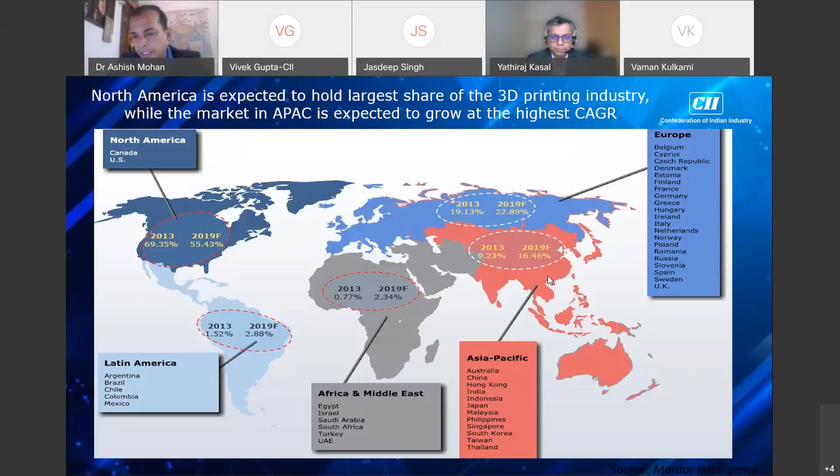That reduction has largely been because the APAC countries have been rising consistently, led by China and South Korea, with Hong Kong especially also a key player. They've been doing very well in the 3D printing technology space. It's expected that in the next 5 to 7 years, the APAC numbers will come very close to the North America numbers, which is a good indicator that there is a movement of high-tech technology applications towards the APAC countries.

What is India doing? Let us see. We all know that, with all respect to responsible growth imperatives, advanced manufacturing and Industry 4.0 have seen relatively delayed deployment in India. The only way out remains frugal innovation, which I think Mr. Yathiraj mentioned when you spoke about GE deploying made-in-India stuff into its flying blades. That gives confidence that frugal engineering is the key. If we're able to break that cost barrier of this technology, we'll be able to take it forward.

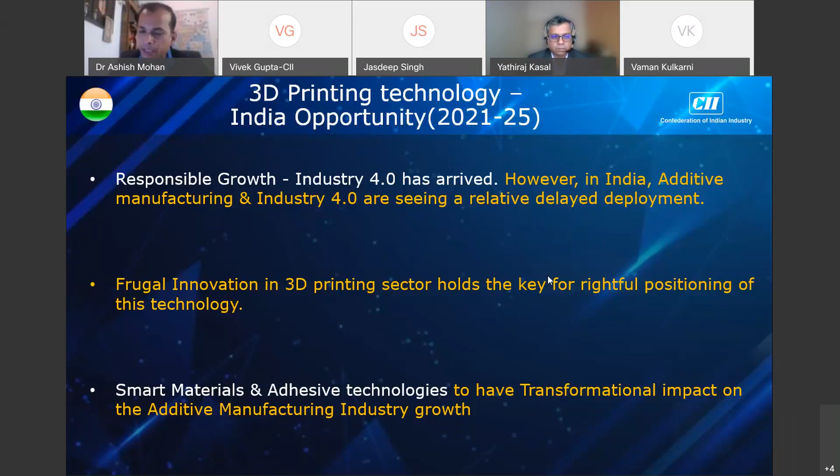Smart manufacturing materials and adhesive technologies are the other imperatives. With respect to India, particularly for 3D printing technology, a SWOT analysis was done by my team, and we find that the Indian 3D printing industry, currently below $100 million, has huge potential to multiply by at least 10 times in the coming 5 years. The 3D printer market alone, not the printing market, is projected to touch $80 million by the end of this year.

I've laid out a couple of strength, weakness, opportunity and threat items here. I'm not going into the first three because the most important to consider and focus on are the red items: increasing imports resulting in higher pricing. If we're somehow able to break this cost barrier of raw materials and the poor quality 3D printers currently offered at low prices, these are key.

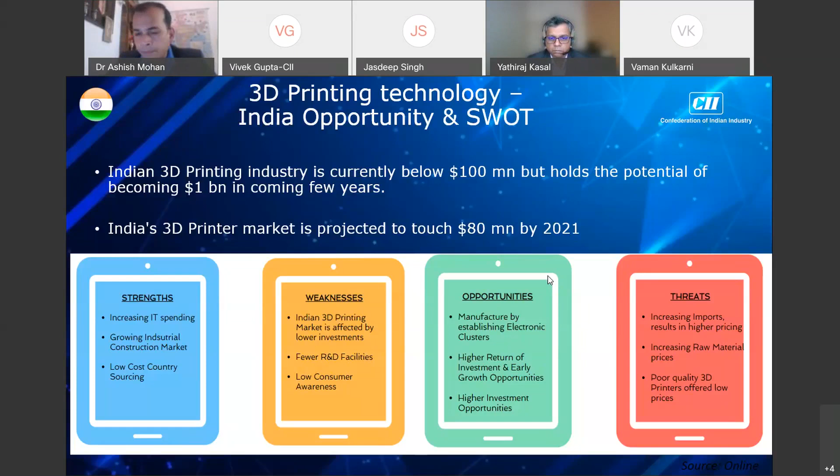Can you kindly hasten, Doctor? Can you kindly hasten? Sure, next 2 minutes, I'll be just closing.

But then how is CII synergizing? We would like to support industry, which are the key places. So the key stakeholders are government, academic labs, and industry, most important. Through smart manufacturing and additive manufacturing technologies, we want to work with the government. We are already working on Industry 4.0 policy recommendations to various technology subgroups, funding opportunities, and we have reached out internationally. These are the 3 dimensions on which we are working to increase the footprint of Indian corporates in the additive manufacturing sector.

Apart from CII, there are other government agencies helping and even funding projects in these domains. Technology Development Board, for example, takes up funding responsibilities for VCs in 3D printing areas. CII has a wing called GITA, Global Innovation and Technology Alliance, which works on 3D printing technology and other collaborative technology fields. Sector specific, we have fundings from National Mission, Nidhi Prayas, and government schemes to promote through Imprint and Imprint 2.0. Details will be shared offline.

So there's a whole lot of policies and funding opportunities available with CII and government. But industry will have to step up its own contribution also to see that substantial gain is made in 3D printing technology. With this, I would like to conclude that the opportunity scale is really plenty and the future is indeed exciting. Thank you, guys.

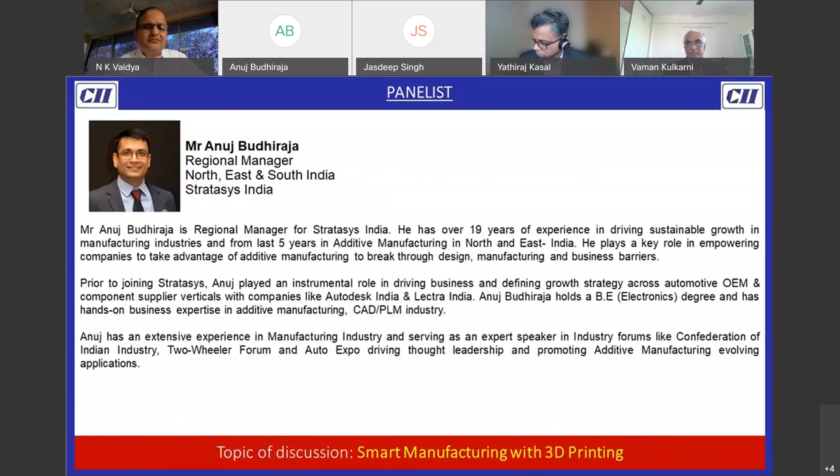Yeah, sure. Thanks for the interesting question. So as we see a lot of applications around polymer as well as metal, I would say polymer AM is going to stay here with a lot of applications emerging now, with a lot of new polymers coming into the picture, starting from ABS to nylon 12 CF, with the highest strength as well. In aerospace, there are 50,000 parts which are end-use parts in metal. Similarly, there are thousands of parts in polymer which are still flying in aircrafts now, being printed and directly used in the aircraft as well. So both polymer and metal are going hand in hand, with increasing penetration into each and every industry, I would say.

I hope I answered the question. Yeah, thank you, Mr. Anuj.